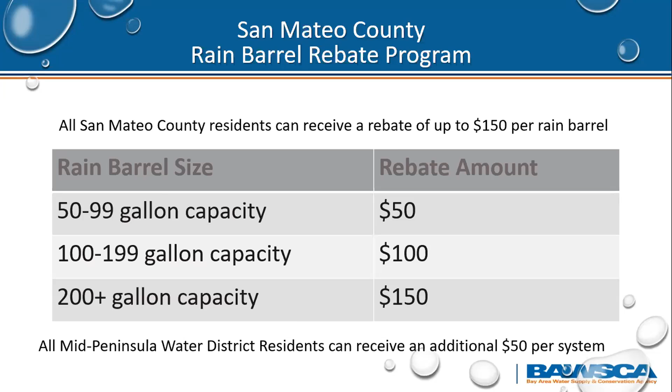And then graduating up to 150 if you're in between that 100 and 199 gallon capacity. And if you're getting a cistern, which is 200 gallons or more, you're looking at the full $200 rebate with that additional $50 from the Mid-Pen Water District. Additional ways to save, these are some new programs over the last couple of years. They have a smart controller rebate program, as well as a rain garden rebate program. And you can find more information about those at bayareaconservation.org.

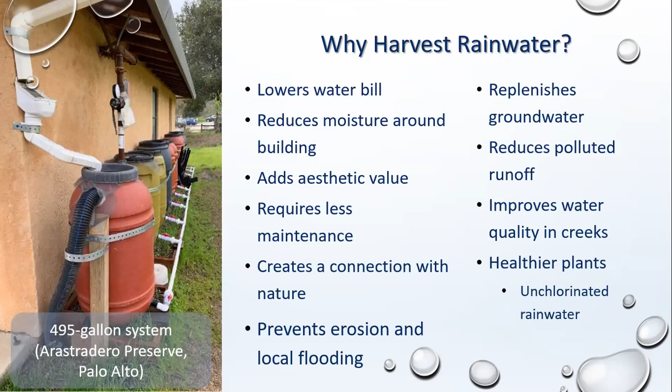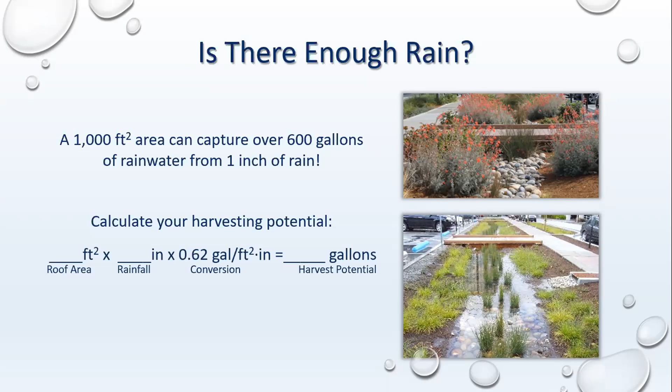So if you take a look at this equation, a 1,000 square foot roof can capture over 600 gallons of rainwater from 1 inch of rain. So this wonderful equation shows that we can actually get a lot of water just from the rain we have here in the Bay Area. So an average rain event here is about half an inch. A 1,000 square foot roof could capture over 300 gallons of water.

Over the course of the year, we get about 25 inches in San Mateo County. Significantly lower than the national average, but it's still a lot of rain. That 1,000 square foot roof has over 15,000 gallons of water that touch it over the course of that year. And a lot of that could be captured because we use our water in between storms.

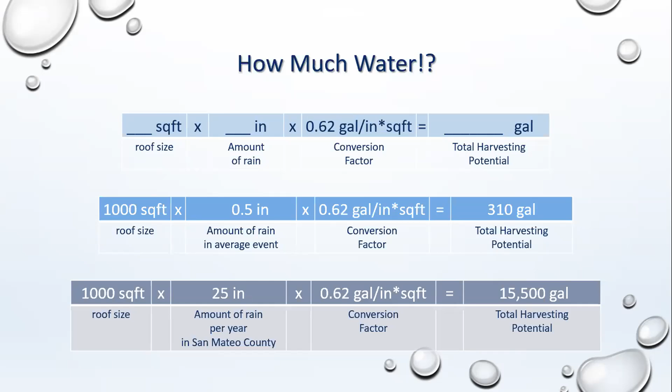And especially here in the Bay Area, we have an issue called flashing, where our rain is a flash of rain, and that first rain just can't quite infiltrate the ground. It can't quite soak in. So we get some runoff over the top of the ground. And we get a lot of runoff on the impervious surfaces, on pavement, and on houses as well. So think about when it rains here, how much water you see running down the side of the road and into our storm drains.

And that water can carry a lot of pollution with it. You can have pollution from pet waste, from vehicles, from just rubbish that's ended up blowing out of garbage cans or has been left on the side of the road, soaps, oils, pesticides, herbicides, all sorts of different pollutions that get flushed into our storm drains with that first bit of rain that is hitting those impervious surfaces and gets taken straight into our storm drains. And now our storm drains don't get treated.

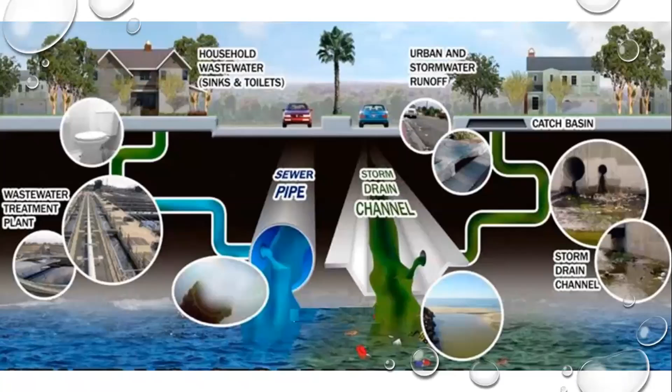So all of our household waste, anything that comes from inside our house, you can see it on the left side of this picture, it goes to the wastewater treatment plant, it gets treated, and it comes out nice and clean after it's treated. But everything that is not from inside our house, everything outside of our house, all of that rainwater goes into the storm drain.

And a lot of times you'll see these on the side of the road. You'll see signs that say no dumping flows to bay, no dumping flows to ocean, flows to creek. And that's exactly what it does. There is no filter on that. There is no treatment. That water goes straight into the creeks, into the bay, and into the ocean. So it carries all of those pollutants with it.

So what we want to do is something called slow it, spread it, and sink it. And that's trying to slow down the water so that we can spread it out and sink it into the ground so that those pollutants don't get carried with it. They get stopped and they get filtered through the ground before reaching our creeks so that we can have healthier creeks, healthier wildlife, and healthier fish.

So rain barrels are a great way to help us slow the water down because that's exactly what they do. They take your first, however size your system is, of water, and capture it and hold it in this nice big tank. So that is slowing that water down. And then when you use that water later, you are spreading it out on your garden, and it is sinking into the ground and being used by the plants.

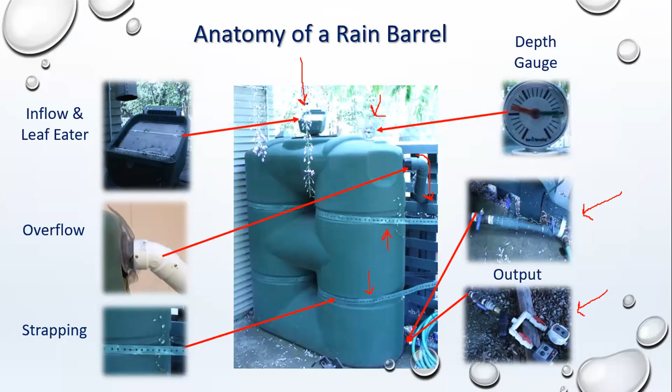This tank is also strapped for earthquake proofing, both on the top and the bottom, just because it is a slimline tank and is on public property. It's always advisable to have strapping, especially if there's young kids that may decide they want to climb up on it, or because we live in an earthquake region, we just want it to be a little bit more secure.

So with the inflow, there are two different ways that you can do the inflow. You can do a full diverter, like we saw in the last image, where the rain flows right into the top of the tank, and all the water from your downspout gets captured here. And the other option is what's called a partial diverter. And this is where you drill a hole in the side of your downspout. So rather than cutting your downspout, you just drill a little hole, and the water flows down the inside of your downspout, and it gets caught in this little rubber gasket, and it flows into your tank.

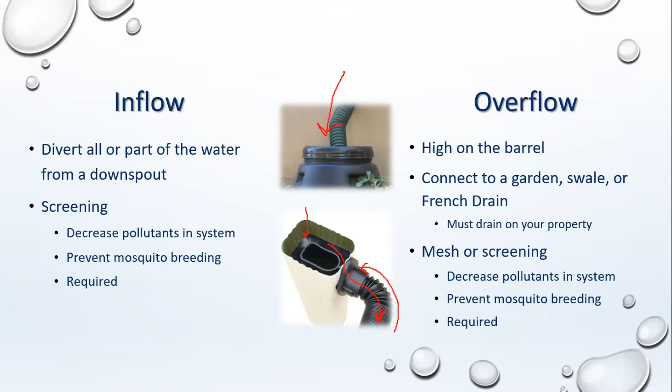And then when your tank fills up, it comes back out the same spot, and it goes up and over that rubber gasket and down into the middle and back down your downspout. So if you have a French drain or a downspout setup that you don't want to cut, this is an excellent option for not cutting your downspout, just drilling a hole in it. And the kit that you would buy comes with a rubber seal that you can reseal your downspout if you ever decide to remove the system.

It's very important that you have screening to prevent mosquitoes. This isn't just, well, Chris says I need screening. This is the state of California says I need screening, because the state of California does not want rain barrel systems to become mosquito breeding grounds or to have other critters getting into your tanks. So this is a requirement. For this type of a tank on the top, your screening would be right here, right where the pipe's coming in. And for this one on the bottom, your screening would be right here.

So the other thing to think about is your overflow. You want it as high on the barrel as you can get it, because if you have it lower on the barrel, the top of the barrel is not going to fill. Everything below the overflow is going to stay in the barrel. Everything above the overflow is going to flow out the overflow.

You need to connect that on your property. You can't just decide that you want to flood your neighbor's yard. You've got to connect it on your own property and make sure you have adequate drainage, some sort of a swale or garden, something that's going to be able to soak up that rain, or connect it back into your pre-existing downspout. And the overflow also needs screening because mosquitoes can fly up that pipe as well. So screening on both of these openings.

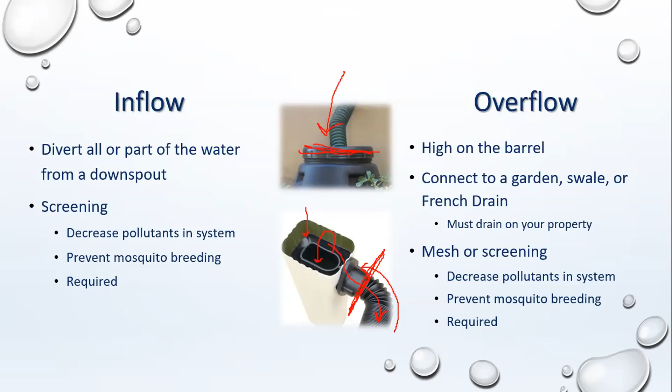Or do you want to water with a hose, a gravity system with a hose, so you just get as much pressure as the water and the gravity provides? Or do you want to use a pump to get a little bit more pressure? These are just personal choices for your system and how you want to use it.

You know, if you want to use watering cans, you may want to set up a spigot that's a little bit higher up on the system, maybe not at the very bottom of the tank, so that you can fill a watering can easily. And there's lots of options on how you're going to use that water. It's very specific to you.

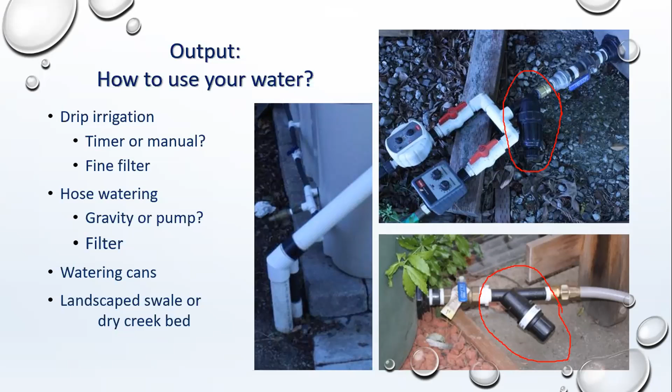A lot of people ask me about roof types. So with roof types, almost all roof types can be used for rainwater harvesting. You can use a metal roof, it's the most efficient, but you cannot use a galvanized roof, because the galvanized is going to rust over time. We don't want that to end up in our water. But copper roof or other metal roofs are fine. Ceramic or clay is great.

The ones you want to think about is if you have wood, cedar, shakes, or shingles, you may want to just talk to the manufacturer and find out when they're first installed how they're treated. Some wooden shakes are treated annually, and as the homeowner, you should know if you're treating your roof annually. And if you are treating it with an herbicide or pesticide, you probably don't want to capture that water and put it on your garden, because you're putting an herbicide or a pesticide on there to kill plants, and it's not going to be healthy for your garden.

Asphalt shingles are actually great for landscape irrigation, but if you get a new roof put on with asphalt shingles, you don't want to connect your system for the first couple of rains, because the roof is going to shed in the first couple of rains, and then afterwards it should be fine. And you can talk to the manufacturer and just find out what the timeline is before it'll stop shedding.

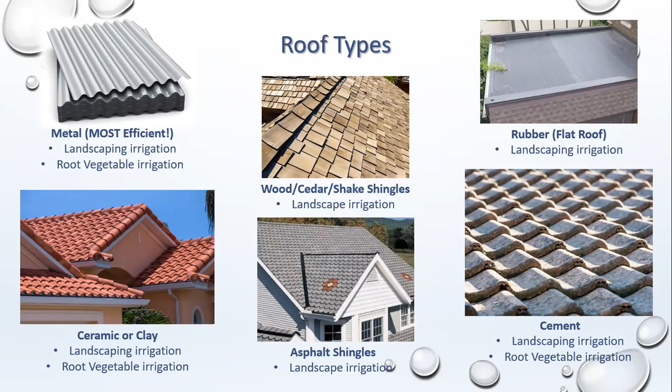Once you get over 200 gallons for that system, you qualify for the top tier rebate. So you don't need to get a 200-gallon tank by itself. You could get four 50-gallon tanks to get that 200-gallon system for the larger rebate.

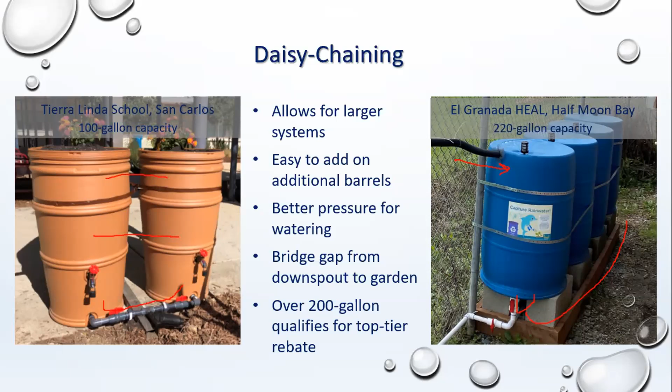So we've talked about a couple of these things that you want to consider when choosing your system. So you want to think about your roof size or harvesting potential. You want to think about your number of downspouts. You want to think about your installation space, your uses for your water, where you're going to overflow it to, what it looks like, and cost.

So think about, do the math, think about how big your roof is and how much water you can capture. And so if you have a really, really tiny roof, you may not want to put that 500-gallon tank on it. But if you have a really huge roof and all you want is a 50-gallon tank, that's fine. A 50-gallon tank will fill off of a very small shed. It's going to fill.

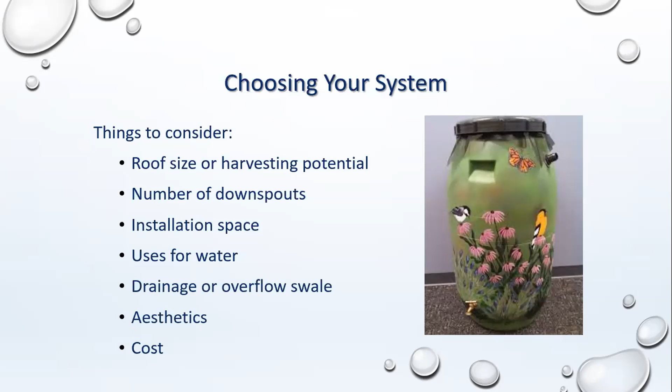And I'm not sure if I just lost my internet connection or if everything's just freezing up. But we're going to move forward to rain barrel accessories. I think we just lost you for a second. Okay, and my slides skipped forward multiple slides. Okay, where did you lose me at? Okay, Jeanette, did you guys hear all about sizing your system? So we kind of lost you at the end of discussing summer storage.

Okay, so yeah, summer storage, you just want to think about how much water you're going to need over the summer and how much water you need to capture to make that happen. So, you know, a 50-gallon tank is going to be great if you're trying to water a very small planter box all summer. But if you're trying to water a very large garden or a bunch of roses, it's maybe not going to be as effective because you're going to need more water than 50 gallons can give you for the whole summer. So just think about how much you need and size your system accordingly.

Oftentimes people do make up water in their tanks. They'll get through June and July and part of August with a drip irrigation system hooked up to their rain barrels, but not have enough water to get through the end of August or September before the next rain. So what you can do is fill or partially fill your tank with municipal water so the drip irrigation system will still run. You're still using significantly less municipal water, but it's called makeup water - you're just making up the amount you weren't able to capture.

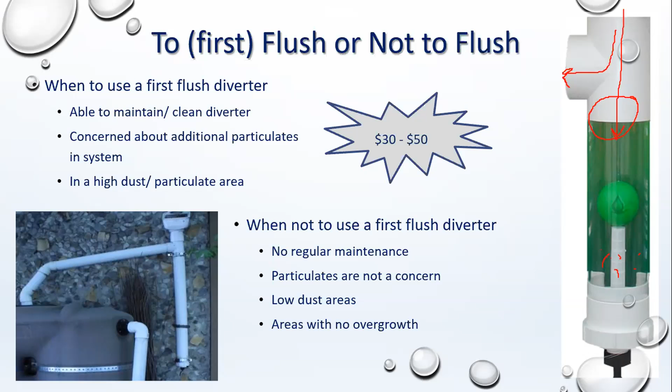Again, it's optional to add, and it's really good for high dust areas, especially if you want to connect to a drip irrigation system, which needs slightly cleaner water with less particulates.

The depth gauge - I've seen people use the remote ones when they're traveling to know how much water's in there, because they have a little camera on it so they can read what percentage is left and ask a neighbor to go fill it up if they have an automated watering or drip irrigation system hooked up to the tank. These are also really great for people with kids or schools, because the kids get really excited about checking how much water's in the tank.

For me personally, I don't have one of these on my tank. I just tap the side, and when it goes from sounding like a thunk to sounding like a hollow noise, that's where the water level is. You can really hear it just tapping up the side of your tank.

It's very optional - some people really prefer to have a little more water pressure, so they get an on-demand pump to use. It's totally personal preference. If you have a very small tank and want to water plants more than 20 feet away, the pump gives you the pressure you need to make the distance. With a 50-gallon tank, you don't want to water more than 20 feet away from it - it's just not going to have great pressure. So this would allow you to water a little farther away.

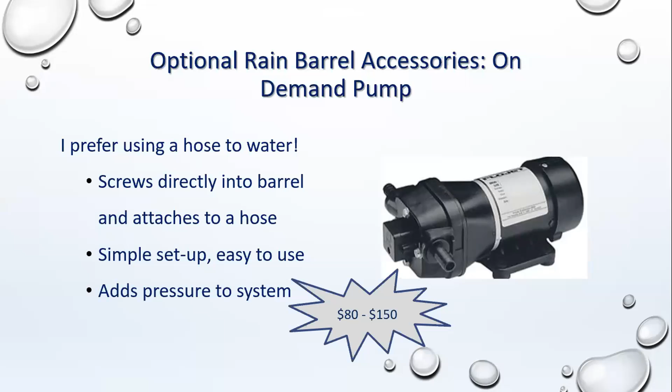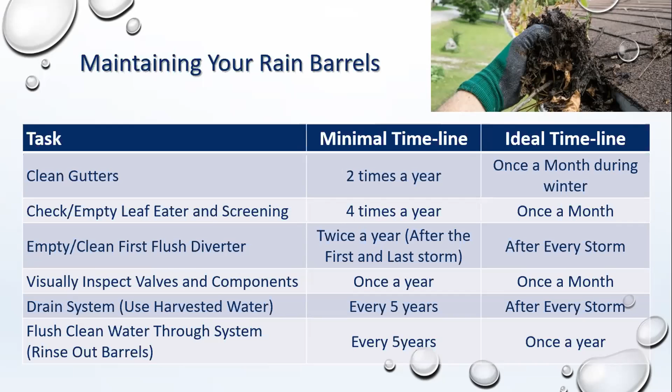Visually inspect valves and components. This one is very specifically a state of California, and this is how it is worded. So once a year. But if your system is next to your house, you're going to be walking by it at least once a week. So visually, you're going to notice if anything's wrong. Use your system and clean out the barrels maybe every 5 years or so. Just rinse them out a little bit, get any debris in the bottom flowed out. So very, very minimal maintenance, very easy to take care of.

Use your water. We've kind of talked about a lot of this. The main thing is, think about using your water in between every storm. Don't wait till summer to use it. If we get a rainstorm in September, use that water in September and October. It's going to rain again, hopefully, and you'll capture more. As we're getting into the end of the rainy season, that's when you want to start maybe being a little bit more frugal with it and trying to save some for summer. But in the beginning of the rainy season, you want to use it in between rains.

So we're briefly going to talk about purchasing barrels, and then we can go into some Q&A, and I have some more details on the rebates here. I know I went a little bit fast, and I'm happy to go over anything else again, but we just want to give you a really good overview about the basics for the rain barrels.

Basic kits you can order online or at a local hardware store. Most local hardware stores no longer keep them in stock on the shelf, but if you ask, they're able to order one to the store or have it shipped directly to your house. Food grade recycled barrels are great. Blue barrels or recycled olive barrels are covered under the rebate. Wine barrels are not, unfortunately. But the blue barrels are really easy, as are the olive oil barrels, to set up.

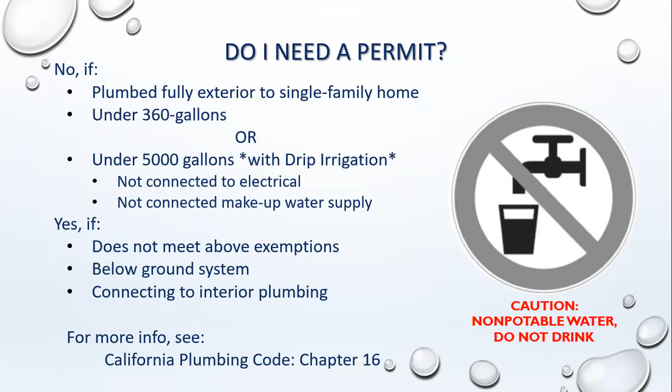And if you get a larger tank, the easiest resource is to reach out through the Flows to Bay website, or the BAWSCA website. So we have a question for the websites. Let's see if I can put those up on the screen. It's funny, I really thought they were in here, but they're not. So let me type those in real quick for you.

Okay, actually, Jeanette, you're gonna email all the participants a list with the website resources for BAWSCA and Flows to Bay, is that correct? Yeah, and I just put in the chat, so it's www.bawsca.org. And I'll type in a little additional information too in a sec. If you hover across the top menu, you'll see a conservation option, and then rebates will pop up. Then here's the MidPen website as well, which will link you to them. We don't have rebate information on our website, we just direct you to BAWSCA. But yes, you can get it through us as well.

And the Flows to Bay one is, I feel like Flows to Bay is the most comprehensive. But yeah, absolutely not a problem. I can get the registration list from Christiane, and I can email all this information out to everybody tomorrow. So Flows to Bay is flowstobay.org, and they have also some installers listed. So if you do need help installing, they have a list on their website of installers. Trying to see if I can find their rain barrel website. Here's a specific rain barrel rebate website for Flows to Bay. So if you guys take a look in the chat, you can copy those over.